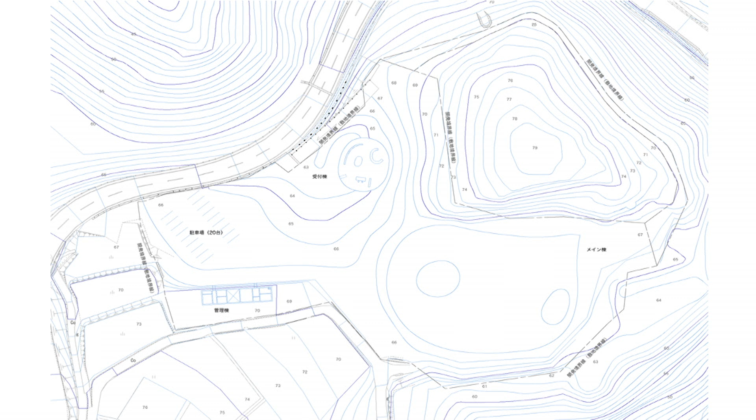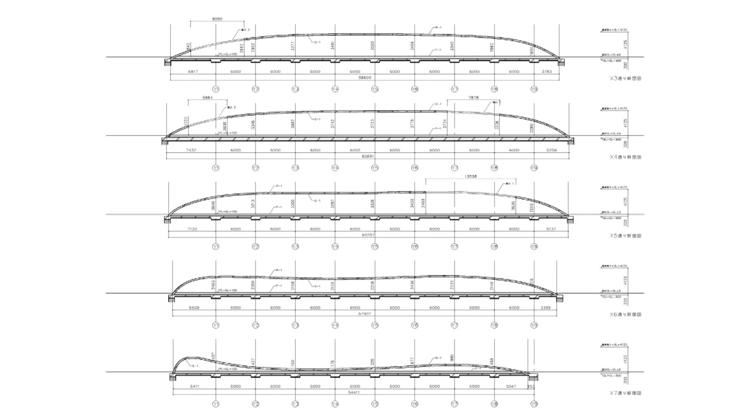One reason I did a free curve is that it can fit very well into the nature. If I did a straight line, I would have to cut the mountain next to the project, but the free-form shape allows the architecture to stay there without any manipulation of the nature. I thought this was a really interesting idea to build architecture in nature. This happened not only in the lateral direction but also in elevation, to create one room, so that the structure spans 60 meters in the long direction without any column or wall.

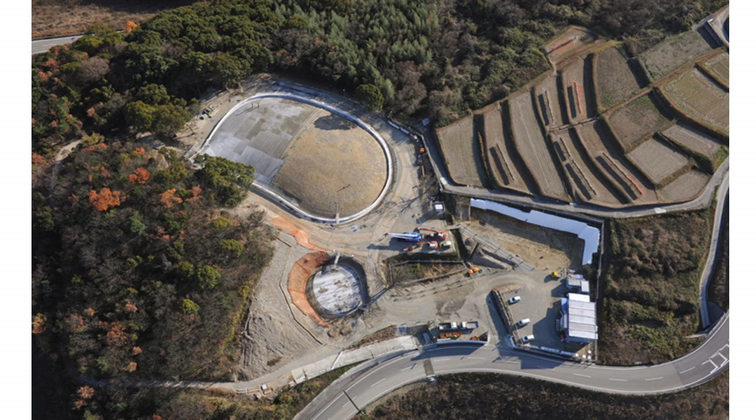Normally concrete structure is made with wooden plywood formwork because concrete is normally flat. But in this case we used soil, earth formwork, because anyway, when we dig the foundation, we have soil. The soil is kind of a free-form sculpture idea — we can make whatever shape we want. I thought this construction method worked very well with this kind of structure.

First, we dig the ground to create a foundation, and then we make a mound for formwork, and then we do reinforcement on it.

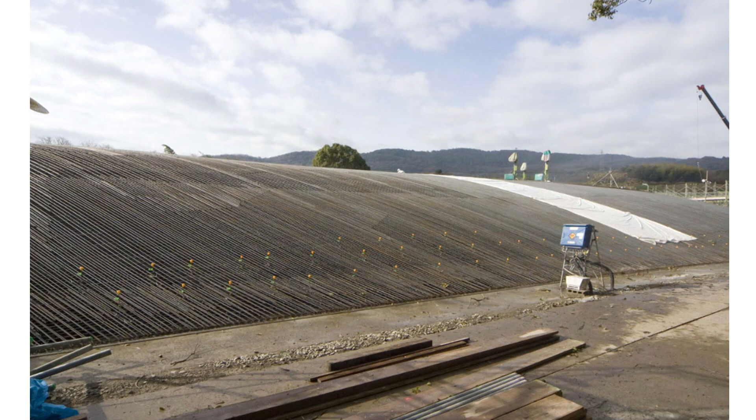This is a photo I took of the construction next to the project. This photo shows how low the structure stays. It was really important for me to keep the height of the architecture very low, to create a harmonious relation between architecture and nature.

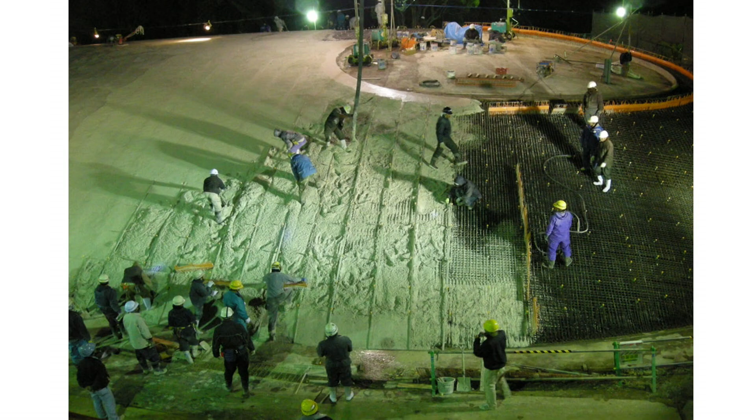Then the concrete workers come to pour the concrete, spending 22 hours because the structure is big. It's a shell structure, so you can't divide it into 2 or 3 pieces. Construction must go all at once.

Then all of the structure has been poured with concrete, except for some hole parts. This is the hole where the construction people come in to bring earth out from the project.

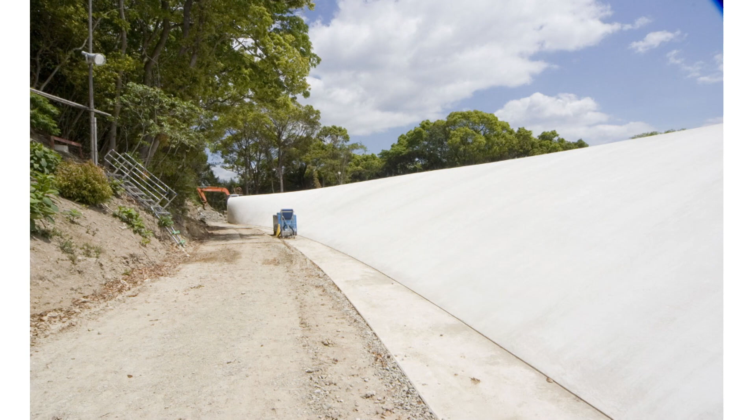The freeform curve is shared by the architecture and the nature. People don't know whether the freeform comes from the architecture concept or from nature. This is a really mutual relation, something that I wish to make.

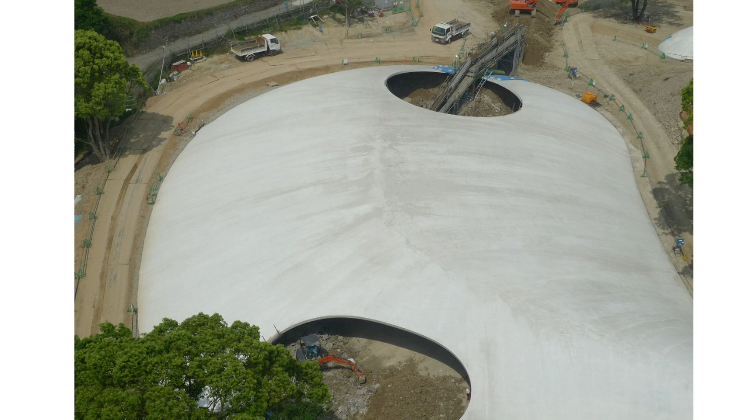Then contractor people come inside the structure to bring the soil out, to create space under the structure. A few big openings are left here, and the water art appears just under the hole.

Then finally I proposed to the artist to keep this window open without any glass. I thought it would be really nice that on a rainy day, rain coming in would join nature and the art together in the structure. This is, I thought, a really nice experience.

There are a few openings for nature, and another opening below for people to come in and out. I try to create not only architecture, but also something together with the landscape.

There's a circular line just next to the art, to bring people to the art project.

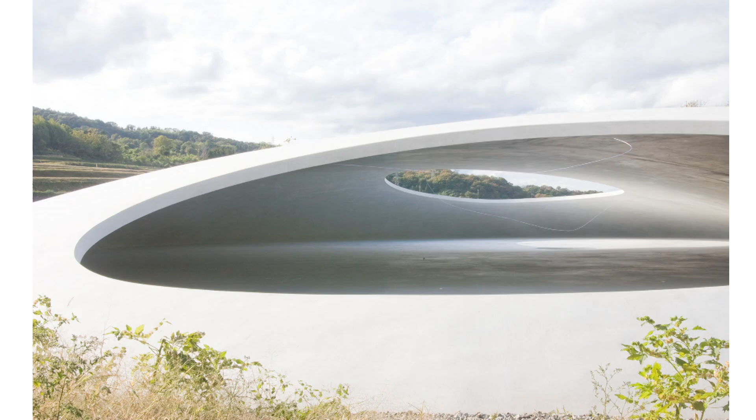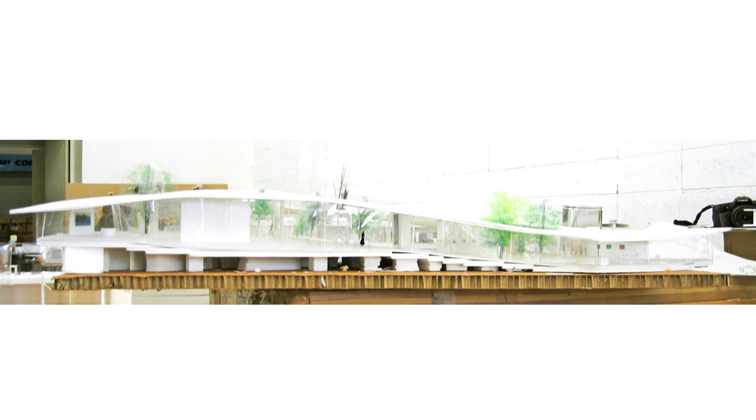This is another museum project that I recently made on the north side of Japan. This is called the Senju Museum. This museum mainly exhibits only one painter's paintings, whose name is Senju-san. It's kind of a private museum.

The project site is sloping; there's a 3 meter height difference between the front and the back. So my idea is to use the existing topography as the architecture floor. My idea is not to manipulate the ground for the architecture, but to manipulate the shape of the architecture to stand on the slope.

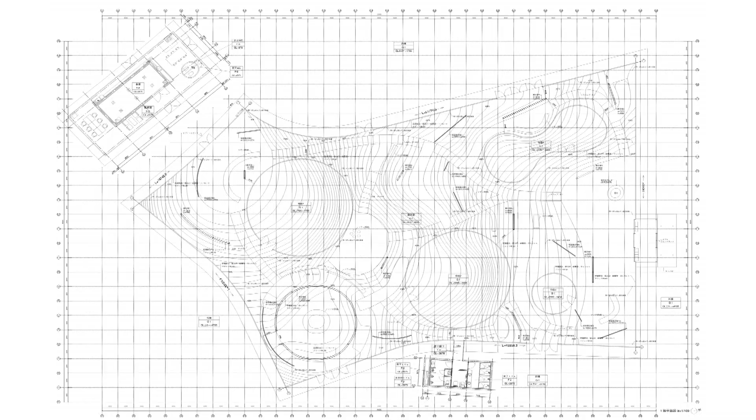This is a floor plan. Basically it's one room, but some parts are divided by the patio, or structure walls spread over the space to support the roof, so that each corner is divided by a structure wall or round patio. Then there's a contour line of the topography going across the space, creating a corner a little bit different between them.

Another shape of the roof is floating above the slope.

There are a few principles in this museum. Basically, one structure wall has one artwork, and you move from that wall to the other wall, and during that movement you feel nature.

Some walls are not structure walls. You can see there's a little gap between floor, ceiling, and wall - this is a temporary wall.

This museum's art collection is growing because this painter is still working - he's a contemporary artist and he's really active, and the collection is growing. So this is the initial situation of when the museum starts, but the walls gradually increase and the density gets higher, but still you can feel the relation with nature and the art.

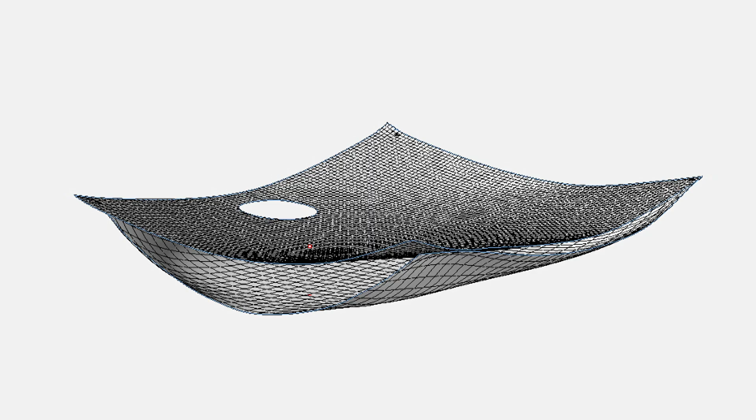And the structure is steel plate. In this case I didn't use concrete, because of the lightweight requirement. So two steel sheets are connected at 4 corners, and all the other parts are free, coming down to the ground, with a space in between.

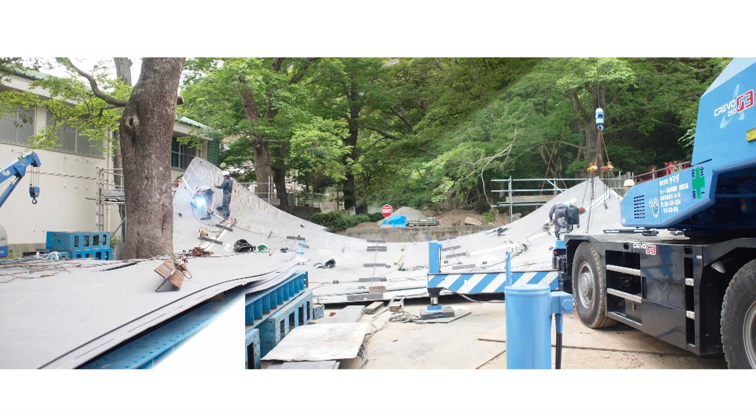We invited industrial people. This is on the island, where there are many active shipbuilding industries still going on. So we invited boat carpenters to create a 3-dimensional metal plate. This is the detail of the corner showing how two metal sheets get together.

It's like a button. The corner is really high, but it comes down very low to give only a 2-meter ceiling height inside. I meant to make this for everybody, but actually only kids can use it.

Only kids can enjoy it, and only kids can enter, because some part becomes really low. There are many reasons for this. There's a shrine just next to it with a high ground, so the new project had to stay lower than the shrine stage, making it really low.

But it can still be used. And this is another project, a house I made in the middle of Tokyo, for 2 young women who work together and live together here.

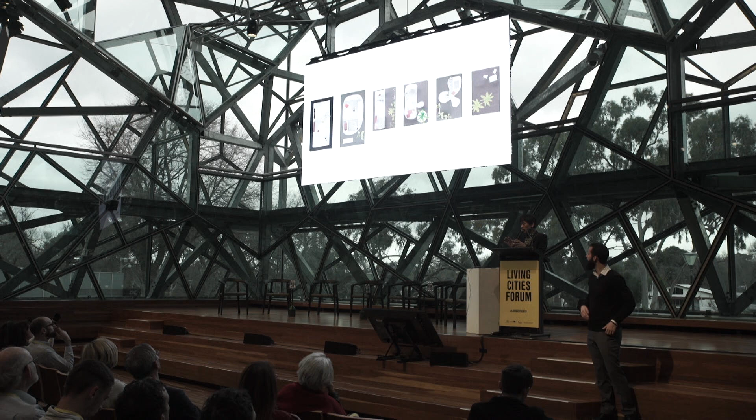This is the ground floor, first upper floor, second, third. Every floor plate has a tiny room and a garden, but the relation between them changes depending on the situation. Then I made holes, openings on the floor plates to get them connected.

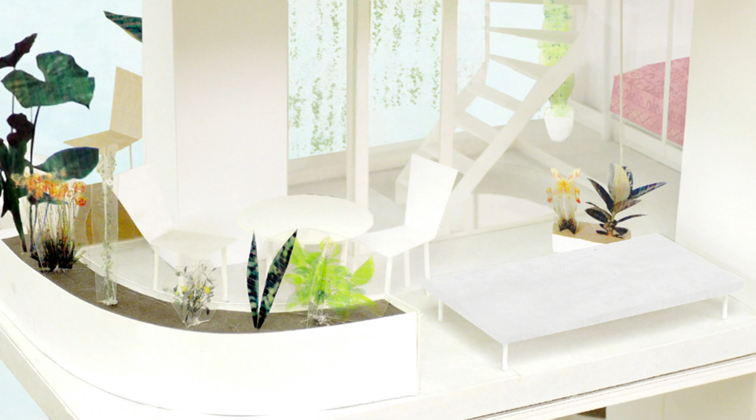On this floor, I have a garden between two rooms, and a bathroom and toilet separated from the main part of the house, so that people have to come out to go to the bathroom. I thought this is nice in a really small house for privacy reasons, and it's comfortable to have a bathroom outside in the garden, separated from the main part of the house.

Since this house is really small, I put many programs even in the garden. This is the lowest garden on the first upper level, you see the relation with the street, the garden is really close, it looks like a mezzanine beside the street. This can be used as a meeting room, and even during winter, since Tokyo isn't that cold, you can use it if you cover the room with a curtain.

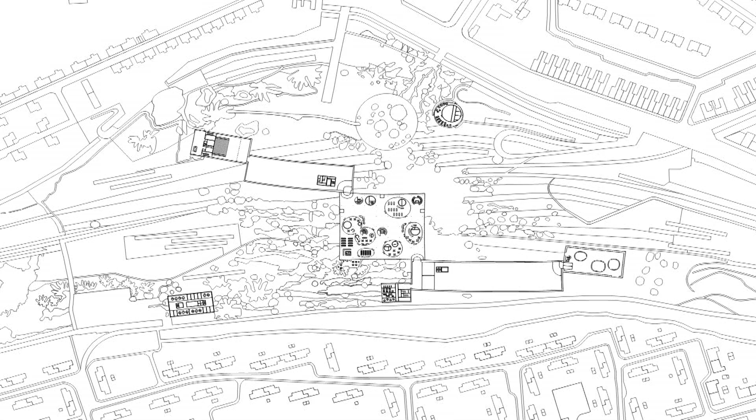Then the project looks like many pavilions get together, and each pavilion is located, standing on a different level because it's a hill. It's not flat, really.

In this project, again, we try not to manipulate the site, to have a natural relation with the architecture and the surroundings. We also studied an option to make the site entirely flat, but we felt that once we made the mountain very flat, we had a feeling that the history is lost. A relation between the town and the mountain is gone.

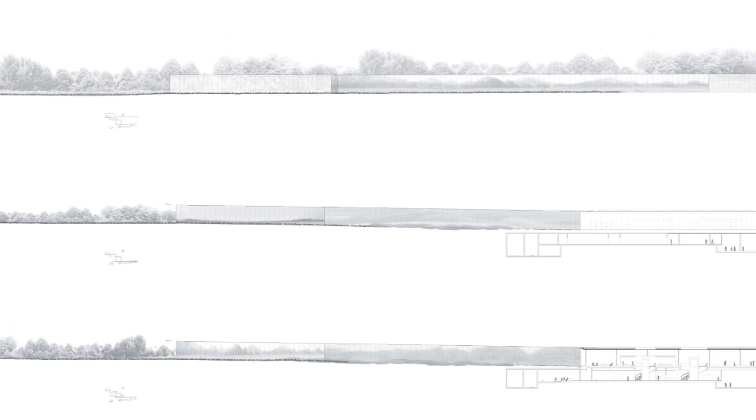That's why we try to keep the natural continuity between the mountain and the town. Basically, this is one story on the ground. They are all open to the public, but it's a really long project, and it follows the topography so that you can go out or come in at everywhere on the ground.

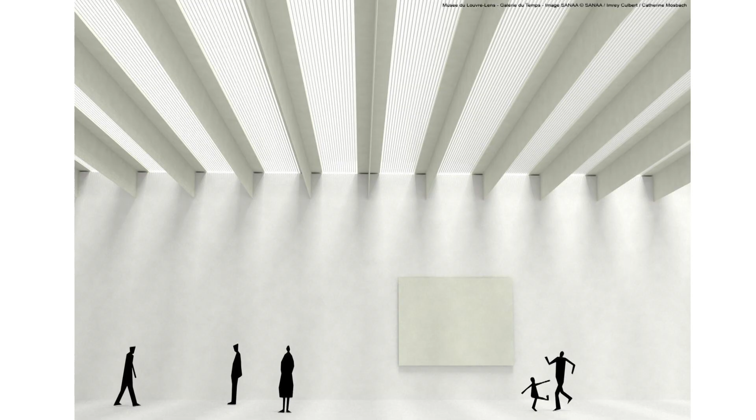Another thing that we propose is to make a skylight. The Louvre collection is really historical. It starts from 3,500 before Christ until the French Revolution. It's a really old collection, so we thought it would be really nice to experience them under the natural daylight that we have today.

Of course, we can shut down the skylight, but normally you can open it up. You can change the mixture between bright natural daylight and artificial light.

This is the permanent exhibition space, which is called the timeline, because each art piece is exhibited along the timeline, so that from the bottom of the photo, you start from ancient art, and as you go up, you can experience the time going up to the 19th century.

As you see the black opening at the edge of the corner of the room, beyond this opening we have a glass gallery, mainly exhibiting contemporary art, or you can see the landscape of the lawns. So we try to create a continuity through the historical art and then the site context.

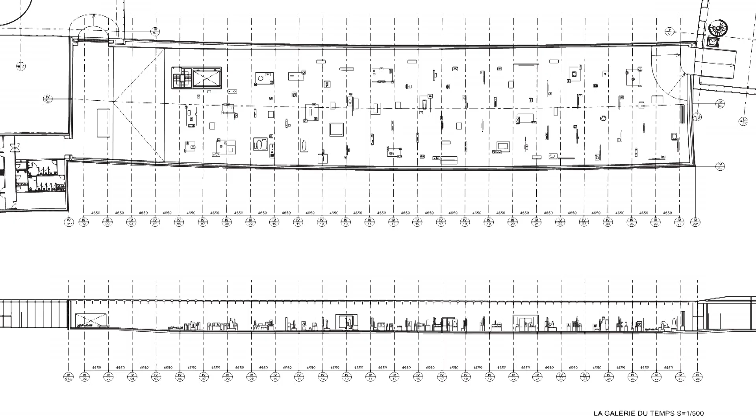We decided not to exhibit art along the wall because the relation between art pieces in European history is really complicated. If we exhibit them on the wall, the history becomes linear. But if we exhibit all of them on the floor, we can present the actual relation between each artwork in a three-dimensional way, so we chose to exhibit all art pieces on the floor, and people get into them.

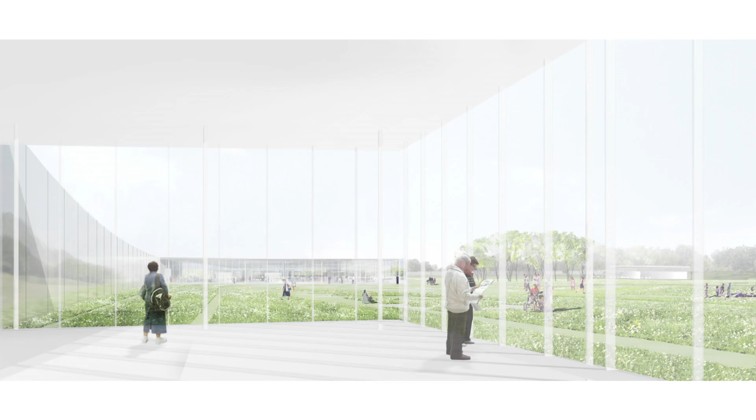After experiencing the time gallery, we come to the glass gallery here. This is the pavilion which comes into the nature, so that you can feel nature and you can see the town below the mountain, and you can understand the situation of the museum.

There are many historical heritage pieces left on the site. This is now exhibited in the garden, so that you can also walk around the garden to understand the context.

The facade is made with aluminum wall to reflect the nature. And then when this comes into the gallery, it will reflect the art pieces. And then we have a skylight all the way through the gallery.

And then the architecture is big. It's really big and long, but it doesn't give you the feeling of destroying nature. Even if it's big, you still can feel the architecture and the nature can stay together.

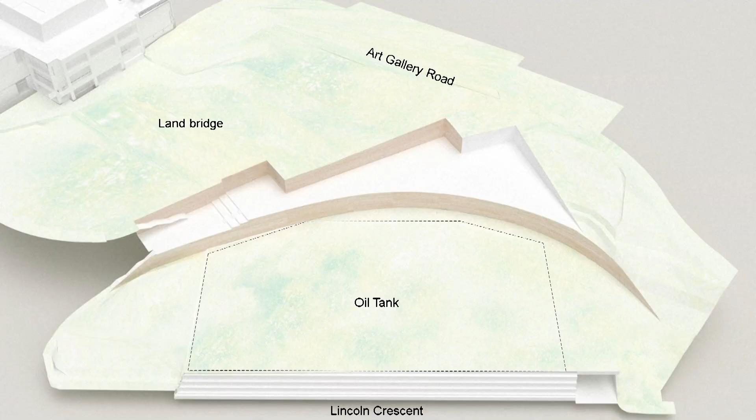And then the architecture follows this historical, topographical steps. The gallery spaces, each gallery space, is located on a different level. For instance, gallery 3 is here, just above the oil tank.

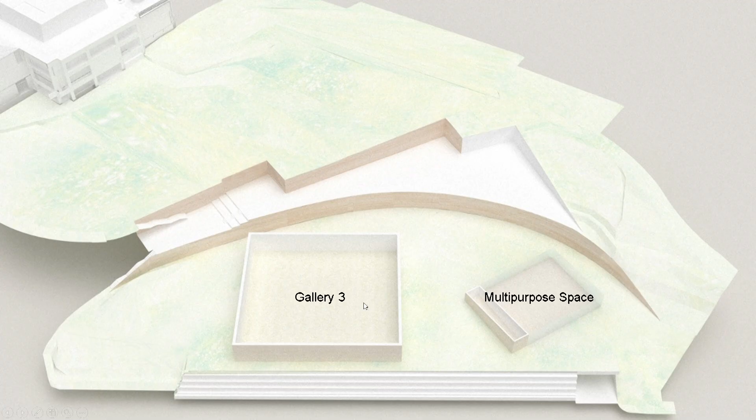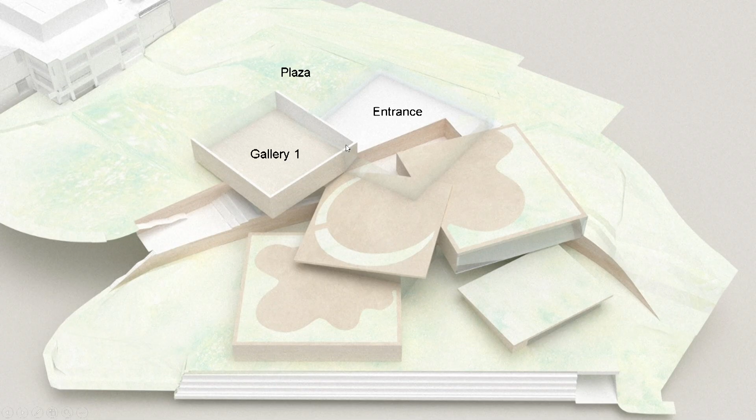And then gallery 2 comes to the second lowest terrace, here, together with the public corridor and the education program. And then the first gallery comes on top, just next to the existing gallery, together with the entrance hall and the plaza.

This is a little bit of a shaded plaza to help people come in on a rainy day. And then one big atrium, public atrium, connects every level. This is the roof and the shaded entrance pavilion. This is a totally open space.

And then there's the existing walkway. People walk to the city. This is to be kept, so people walk through the museum every day.

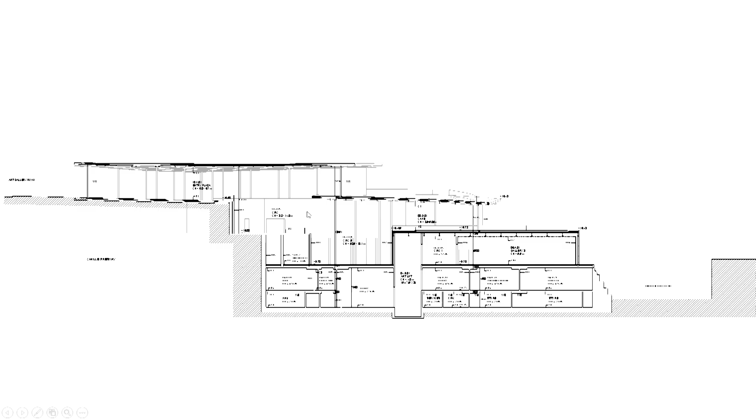This is a section that you can see how the space continues from the top to the bottom, even to the oil tank. And this is, you can see how the existing gallery and the new gallery have a direct connection to the park or botanical garden in front.

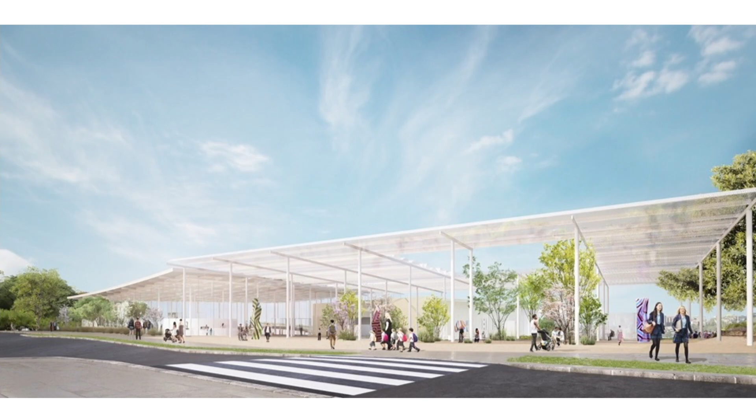And this is the entrance situation that visitors can see first. There's the roof, shaded roof, and then the entrance hall here. And then it's transparent, so you can see the view to the harbor, which is open to the harbor direction here.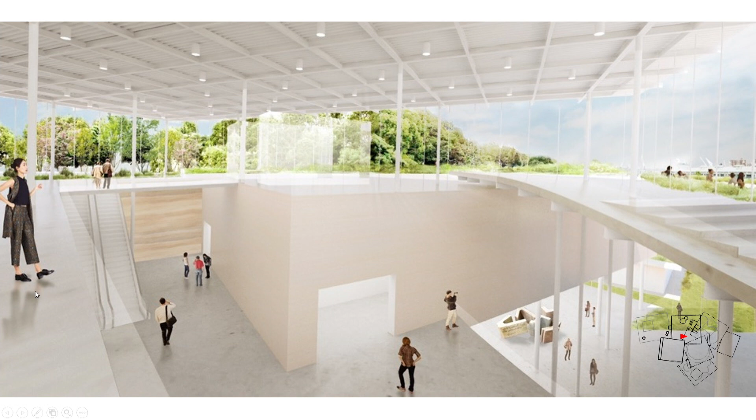And then you also can see the atrium going down onto the oil tank. You are naturally guided to come down to the harbor.

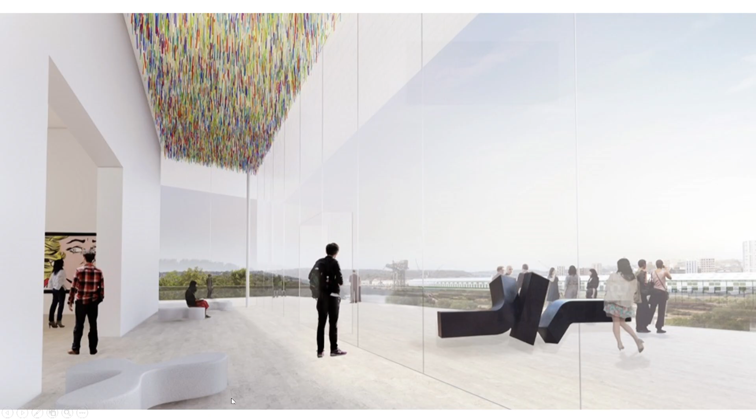And then each gallery has, Japanese people call it engawa, a kind of in-between space between inside and outside. This is the gallery on the left, but you can step out to enjoy the view. You can stay inside, and this is an open corridor, but you can enjoy how the landscape and the view change from the domain to the harbor, which is the lowest part.

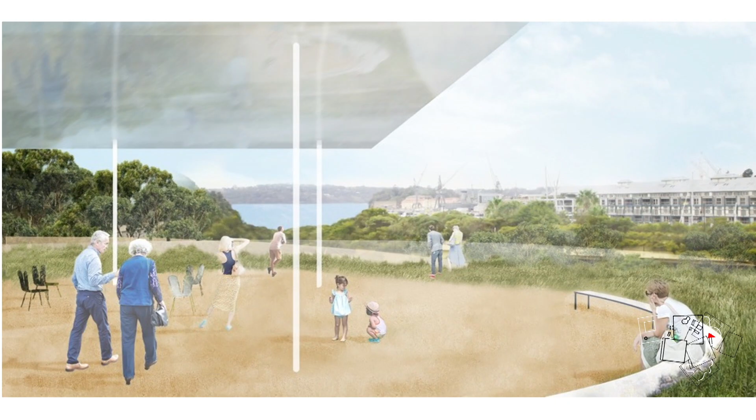And then you sometimes can go out to really enjoy the nature. There are a few circulation paths going all the way down to the lowest part, like stairs, elevator, and escalator. And then we have a cafe on the right.

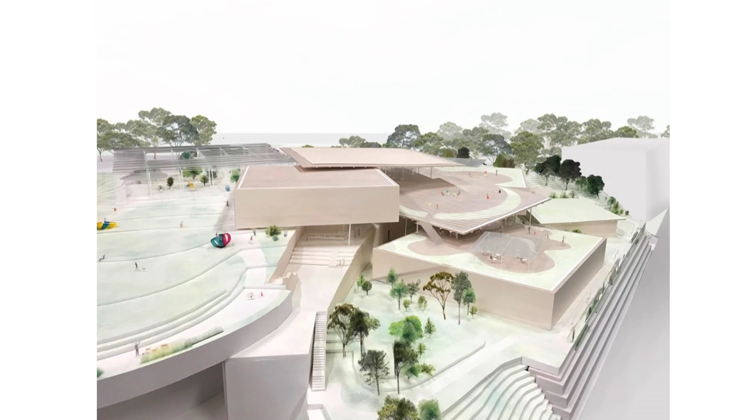Because you can see the existing gallery, you can see the highway, land bridge, and the rooftop oil tank, and the inside oil tank, and the harbor outside.

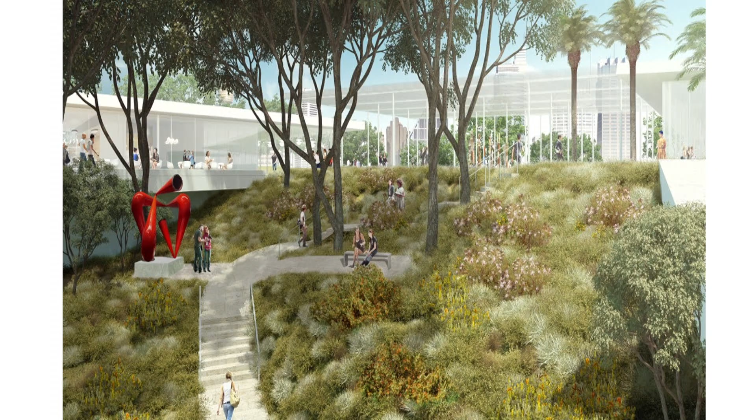This is the way people walk. People don't have to enter the museum when they go across, because this is a kind of architecture, but also a kind of park people can walk through.

I think this is the last image that I can show today. Every project, we try to create a mutual relation between architecture and nature, and the people can experience a continuous relation. The architecture and the nature can always stay together in a nice way.